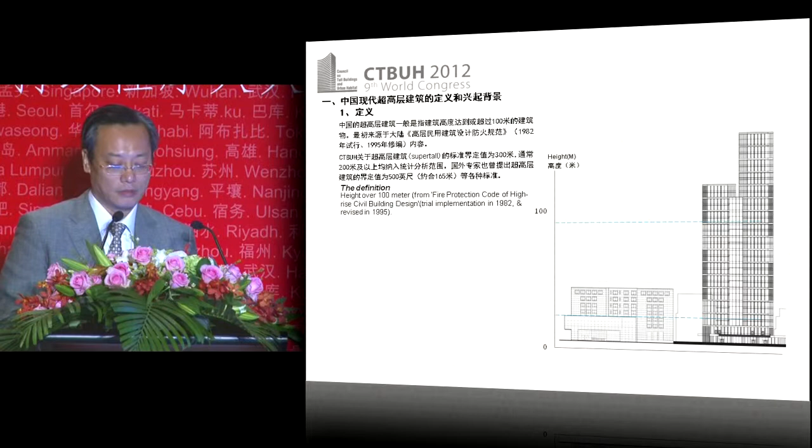The CTBUH definition is usually above 200 meters or 300 meters, and it is defined as mega high-rises. And in China, in the 1980s, according to the design code at that time, it was above 100 meters.

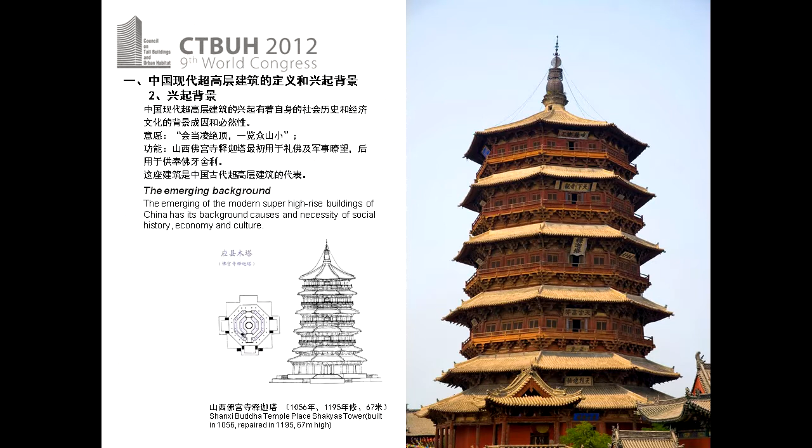And actually, starting from ancient China, we already had such high-rises. This is from 1,000 years ago. It was a high wood structure, and it was the tallest at that time in China. It was less than 100 meters, 67 meters, and it was tested by earthquakes.

At that time, people wanted to stand very high and very tall, to look at the view of everything beneath the mountain, and it was a Buddhist building. At the same time, it was also a watchtower for military purposes. And inside, it contained some Buddhist relics. This was 1,000 years ago.

And concerning ultra high-rises, I'm going to talk about the clue of the development and the driver of the development in the next section. Concerning the development of high-rises, let's talk from the time perspective in chronological order. Generally, it is divided into 4 stages, and currently we are at the prosperity stage.

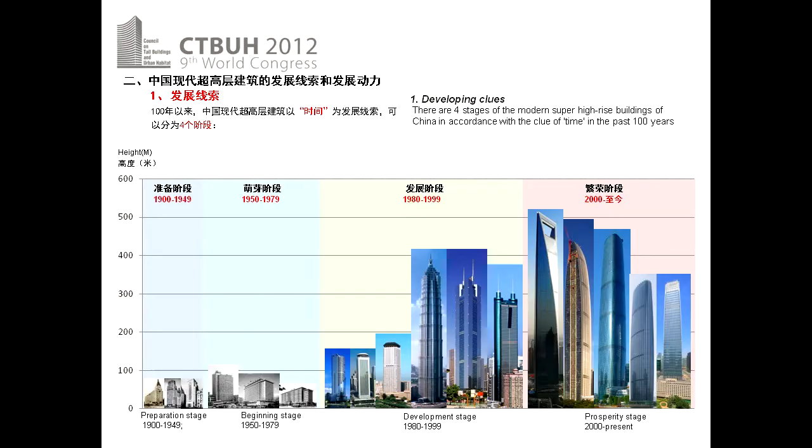It began from the concessions in several cities, and it was called the preparatory stage, which started from 1900 to 1949. At the time, the buildings in Shanghai were basically all below 100 meters. The second stage was the budding stage, from 1950 to 1979. The development stage was from 1980 to 1999. And the prosperity stage started from 2000 until now. So we had these 4 stages.

You can look at the number, the height, and the economic influence in these 4 stages, respectively. The standards for defining these stages are multidimensional. First is the height of the buildings, second is the per capita GDP of the city, also the total number of built buildings, and the regional areas. And the last criterion is the policy environment.

Something's wrong with the slides.

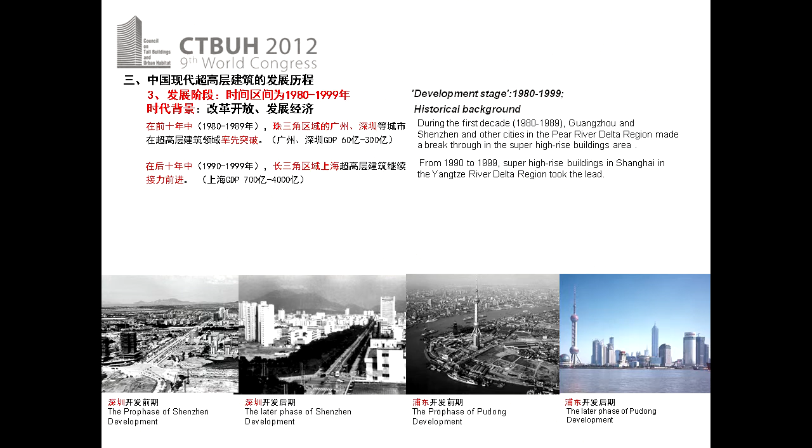From 1980 to 1989, in Guangzhou and Shenzhen, GDP developed from 6 billion to 30 billion. And in Shanghai, starting from 1990, GDP went from 70 billion to 400 billion. That's why we can see a concentration of high-rises in these areas in this period of time.

In the first 10 years, Shenzhen's International Trade Center was 160 meters, Shenzhen's Development Center Mansion was 165 meters, and Beijing Jincheng Mansion was 183 meters. In the latter 10 years, in the 1990s, Guangzhou Zhongxing was 390 meters, Shenzhen's Emperor Building 384 meters, and the Jinmao Tower 421 meters. So you can see high-rises accelerated in these areas in this stage.

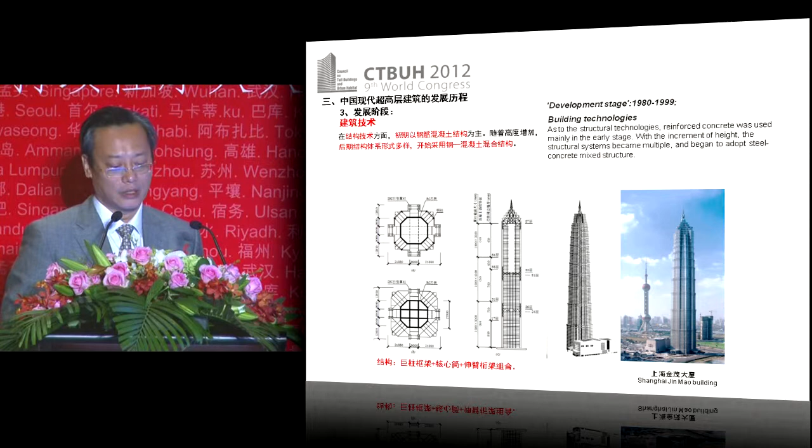During the development stage, the development intensity was not so strong, and it was mainly distributed in Tier 1 cities. The height was mainly below 200 meters, and the high-rises were mainly single function. The government started to stipulate, for example, the distances between buildings and the capacity of the properties, and also supported with different laws, regulations and rules.

In terms of structure, first it was rebar concrete, but in the later stage it started to use mixed structure of steel and concrete, and in the end stage, mainly different kinds of combo structure. In the development stage, for fire prevention technology, the government designed a code in 1995.

In terms of M&E, a lot of AC systems, the cold source, heat source, and BA systems were widely used. And in elevator technology, there were a lot of technologies, including variable frequency, double deck, 3-guide, and sightseeing elevators. They all started to be used during this stage.

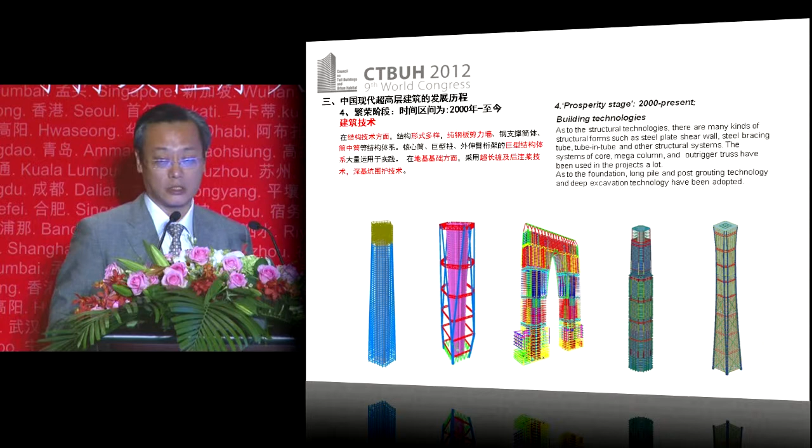And the other concept is the combination of multiple functions into the same building. Currently, in Shanghai, the World Finance Center is already built, and the total height is 400 plus meters, with business facilities, hotels, and conference facilities, and with the connection of transportation.

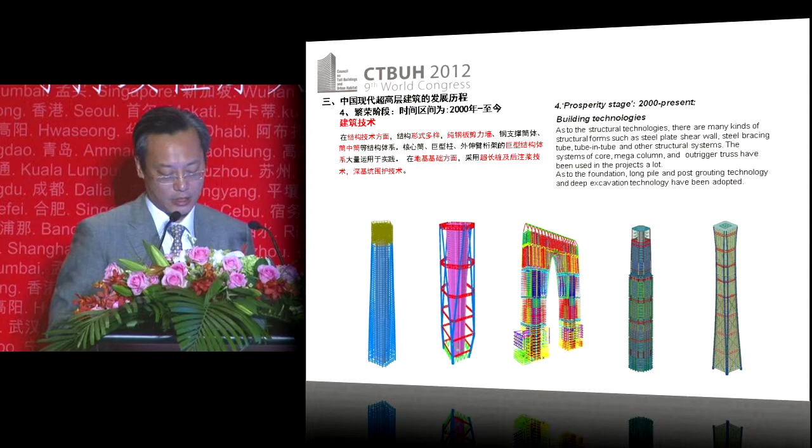In terms of construction technologies, there are many forms of structures adopted, such as core walls, steel plate shear wall, core in middle of a core, core tube, mega column, and outrigger, etc. It also has included some design for seismic resistance and disaster relief. And the digital wind tunnel simulation technology was also adopted, and the computer software can simulate the construction process.

In terms of construction technologies itself, this is the first time we see automatic wind damper devices on top of this building. So in this formation stage, in many dimensions, we have achieved a lot of advancement, and this will have an impact in the following stage.

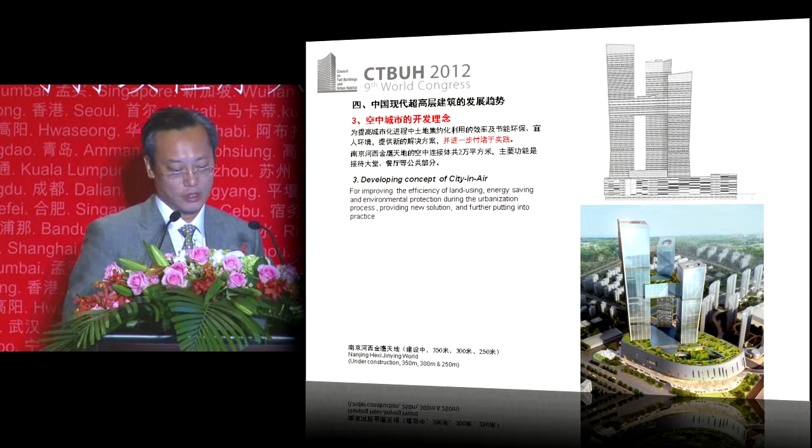In the Nanjing Hexi Jinying Tiandi, the total height is 350 meters, and on the subground level, there are transportation facilities. In the ground areas, there's a lobby, a restaurant, and some service functions provided to the occupants, and the total area will be 900,000 square meters.

In terms of green concept, we have tightened the power consumption limit and tried to minimize the carbon footprint. This is not only a demand from the market, but also from the government mandatories. And regional microclimate will also be considered.

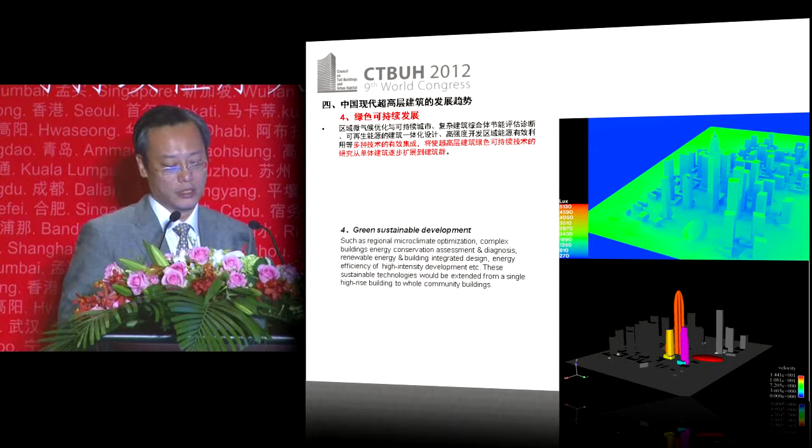We will see some BIPV technology and the maximum utilization of regional resources, such as non-traditional water source utilization technology. In many cases, we will see the centralized regional energy center to provide energy to the building.

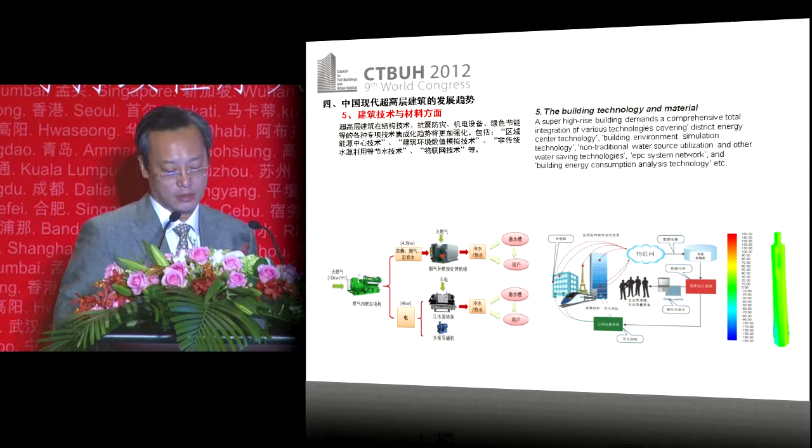And in terms of structure technology, material technology, M&E technology will be further enhanced. We will see the emerging technology of Internet of Things spreading in these ultra-tall buildings. And the efficiency, the comfort, and disaster handling capacity for these buildings will further improve.

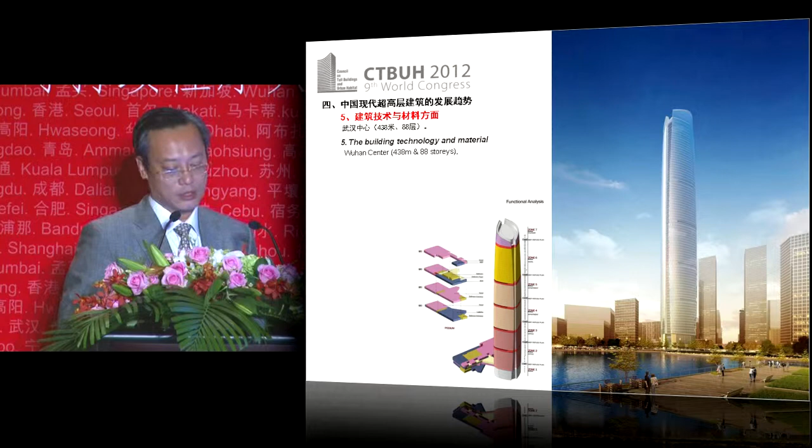These will be based on the previous years of preparation. And China's ultra-tall building design and construction will be founded on our proprietary technologies. The regional cluster model and the complex or multi-purpose model will continue. And for the asset lifetime evaluation - starting from the planning to material planning, construction energy consumption planning, operation energy consumption planning, and afterlife planning - M&E considerations will help us reduce the total footprint of these ultra-high buildings. Thank you for listening.